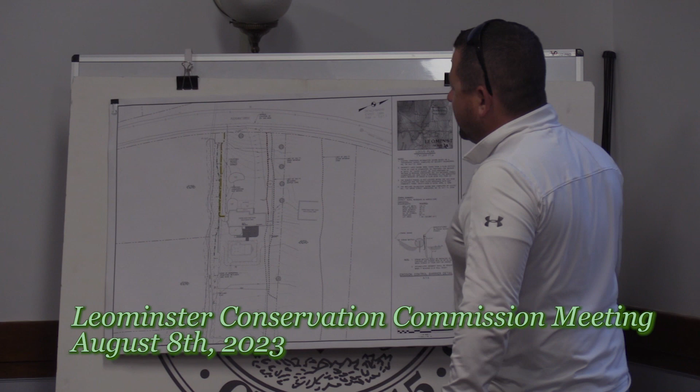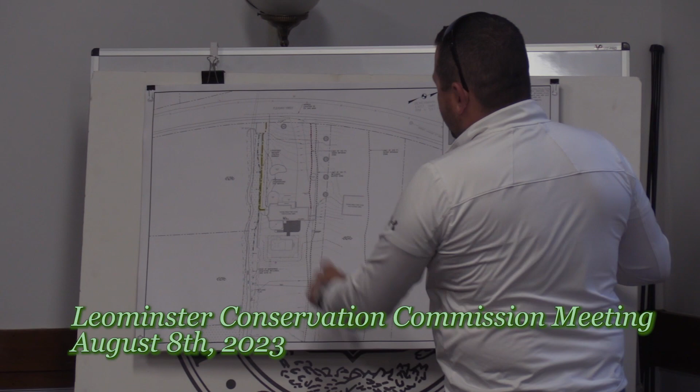We built the house in 2002. It's currently heated by oil heat. In the corner of the house, in the basement, is our mechanical room with 2 275-gallon oil tanks. We're doing a whole renovation of the HVAC system and we'd like to convert to natural gas. There's natural gas on the street, so we're proposing to run a new gas line down the side of the yard into the house.

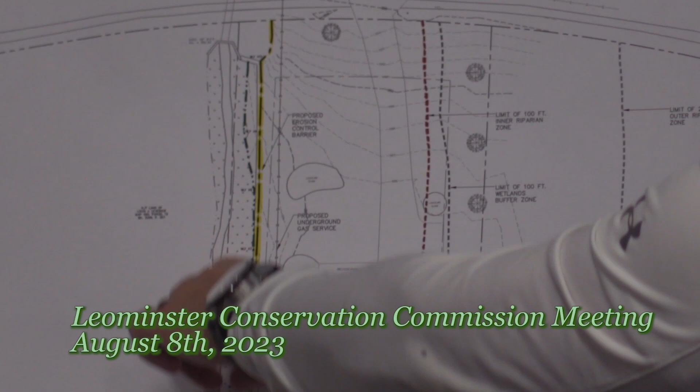This is Wilder Brook. There is a granite retaining wall along the side of Wilder Brook that varies from 4 feet to 6 feet in elevation change up to my lawn area. So we're proposing to run an erosion control barrier, stake silt fence and straw wattles along the top of the wall, returning to the house, then put the gas line in. National Grid would do the actual line installation, but since I'm pretty meticulous about my yard, we'll have our own crew there to install the silt fence, assist with the backfill, get the loam and seeding done right away and restore the lawn.

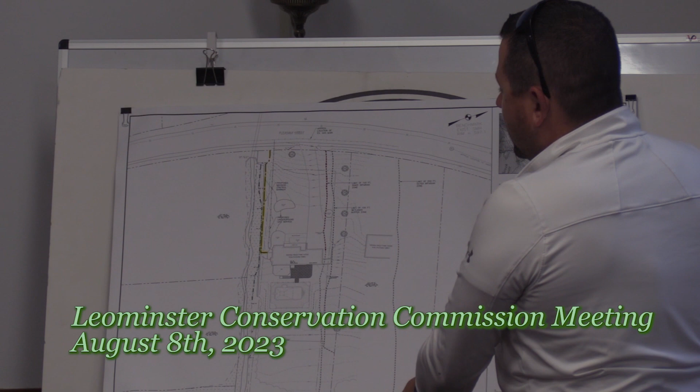So it's pretty minor, it's all currently developed area. I'm just hoping the commission would grant a negative determination so we can proceed with the gas installation. First question - this says in our agenda that it's for replacement of a gas main, that's not correct, is it? That was for installation of a gas main, correct.

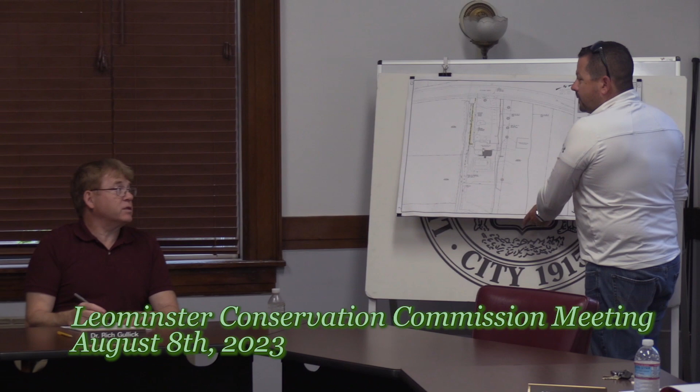So let's please update that in the agenda for the record. How deep do those lines have to be? Only about 3 feet. So you trench it? No, they're actually going to dig it, but they use a really skinny bucket. I'm actually hoping they'll let me dig it myself with the mini excavator, and then I can minimize the mess.

It's kind of like a digger for a cable. How small is it? No, it's an actual trench - you have to dig a 1 foot wide, 3 foot deep trench, put some sand in the bottom, lay the pipe, cover it with sand, put the marking tape, and then put it all back together. So 3 to 4 days tops. First day we'd set up the silt fence, second day would be the tap in the street and potentially some site work, and then continue to the house, backfill, loam, seed, and turn the sprinklers back on.

Commissioners, questions, thoughts? I had mine. Okay, anything else?

Okay, with no further questions from the commission, we'll open it up to the folks in the audience if anybody has questions related to this particular case. Then we'll close this hearing, having checked with the audience, and move on to Mr. Kremp. What do you recommend in this case?

It's a pretty minor job. The only reason I advised Patrick to put in an RDA for this is because of the proximity to that stream. But like you said, it's existing lawn, it's really quick work. So I would recommend that we find a negative-3 determination, specifically that this work is in the area of our jurisdiction, but will not affect the resource area given certain conditions. I'd suggest we put in the condition that there's an erosion control barrier, which Patrick already stated they're planning on putting in, and that they would notify me when they're planning to begin the work. That's my recommendation, a negative-3 with those two conditions.

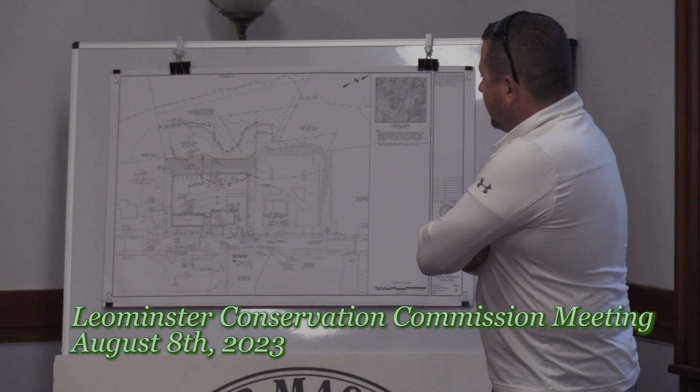Here tonight representing New England Style, who is the applicant and has the land under purchase and sales agreement from my father, Daniel McCarty, under his realty trust. A little backstory: my father purchased the property about 30 years ago.

It was mostly wooded. There was a small auto machine shop building here where the guy would rebuild engines and do auto repair. My father's initial thoughts were to build a 2-story industrial building because the site did slope down towards the back.

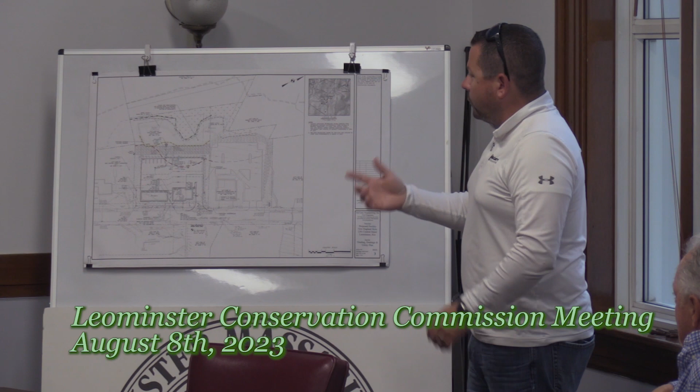So Route 12 here along the bottom of the page, slope towards the back. That building turned out to be very expensive to build because the foundation would have to be so strong to resist the soil above it. Never really made sense, so it ended up splitting into 2 parcels.

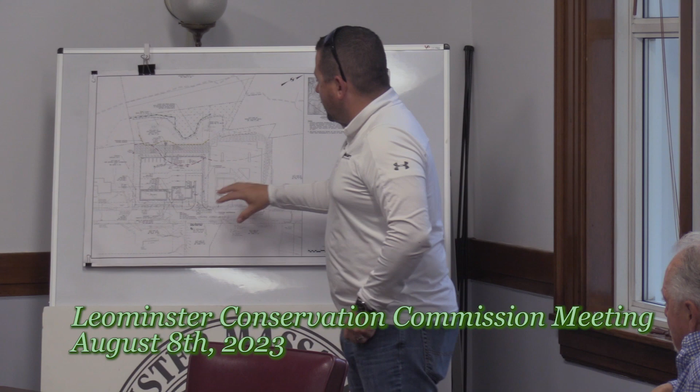The original parcel was here along the street, all the way to the back, this jog here and back. We split off 1 lot, sold that to the Jehovah's Witnesses who did their own Kingdom Hall construction on this portion of the lot. Prior to even doing that, we had filled in both sides.

We had constructed the detention basin, installed the outlet control structures. So when we did the site plans and permitting for the Kingdom Hall, we used a portion of the capacity of the detention basin.

And now with this new project, we're proposing to use the remaining capacity of the detention basin to handle the stormwater that's coming from this project.

So we have the delineated edge of wetlands that was delineated years ago and re-verified by Mary Ann DePinto of 3 Oaks Environmental. Her reports are included in the notice of intent that was submitted.

We have the existing slope here that we were showing riprap, but it's taken so well with the loam and seed that we're going to take the riprap off the revised set of plans, and this will remain as a grass slope.

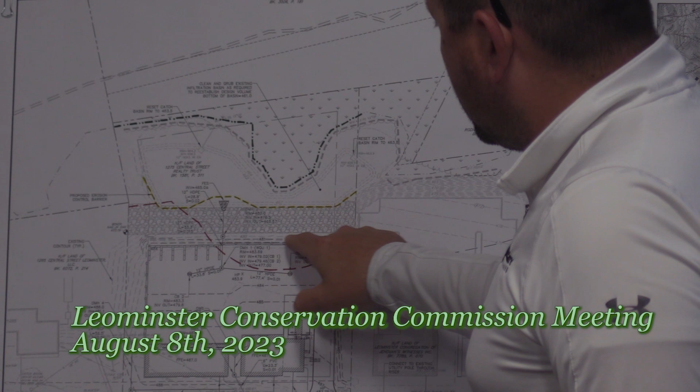So the wetland line is here, the red is the 100-foot buffer zone, so the work that's within jurisdiction is this small area of gravel laydown yard, the guardrail that's at the top of the slope, and then we do have 2 double catch basins that go to a water quality unit, to a manhole to step down the grade, and then the discharge pipe to the detention basin.

Please describe the water quality unit. It's a proprietary stormwater unit that's meant to remove the total suspended solids from the stormwater before it discharges to the detention basin. There are different manufacturers, Stormceptor, HydroWorks, which essentially create a vortex inside of the structure.

So as the water comes in, it gets that spinning motion, it forces the particulates to the bottom, and the clean water goes out the discharge side to the detention basin.

What about petroleum products? They're also equipped with hoods. The catch basins are equipped with hoods, so the oil, being lighter than water, would sit on top, and the clean water would go out under the hood. So if there was a spill, it would get caught in those structures.

Anything inside the building would get caught by the floor drains that go to the oil water separator, which then discharges to the city sewer.

I guess that's part of the history that I forgot to tell the commission: this site didn't have sewer, so we extended the sewer years ago, probably 2008 or 9.

We started at the trailer park where the sewer ended, and we ran a sewer line up Central Street within the pavement, providing stubs to the abutter up on the factory and the house up on the hill, the single family house that was here. Then the sewer comes into the front of the site, continues all the way across, feeds the Kingdom Hall, keeps going to feed these buildings, and we brought it over and tied it into the animal hospital.

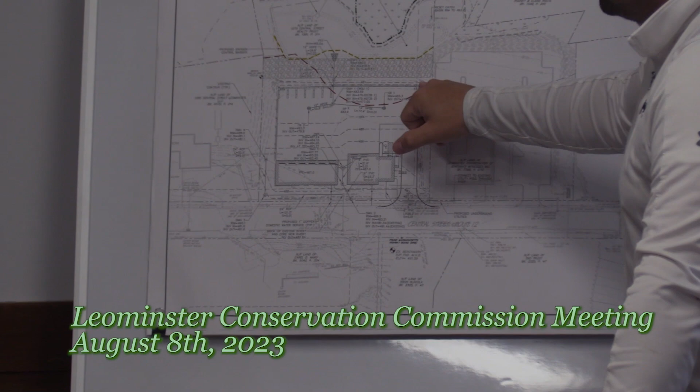Thank you, sir. Commissioner? You mentioned snow storage, where would that occur? So we're gonna have it here along the side of the driveway. The thought process being if you're plowing and coming in, you'd angle your blade away from the building, so you'd windrow here along the side. We have this large area over here where we could stockpile. There's a guardrail, so it's not practical that we'd push it down over the hill and take up detention basin capacity, so it would really be the outside edges of that.

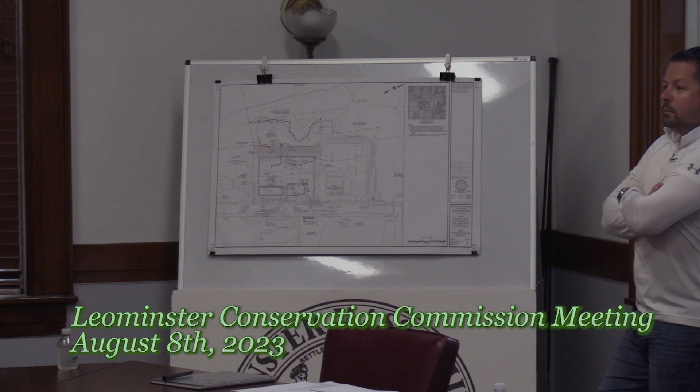Well, I would be wondering if you put it on the pavement, and if there were to be any melt with petroleum contamination from parked vehicles or wherever, that would go into the drain that goes through the oil water separator. No, so the oil water separator is just for the interior drains. The exterior from the parking lot, that's when you have the catch basins with hoods.

The hood is meant to stop it, it goes into the outlet pipe as a shield, and so any floating debris or oil sitting on top of the water doesn't get down there. And then, of course, DEP regulations say, I believe it's 15 gallons -- if you have any spill greater than 15 gallons, you have to call DEP and the fire department to respond to that. Commissioner Quinn? So that would take care of any sediment or petroleum product.

But I can't imagine that would be particularly effective for salt or anything dissolved in the water. Right. Okay, yeah. So are we planning on salting this parking lot? I would assume. Are there?

Please don't take offense to this response -- I've been an expert witness in 7 slip and fall cases as a professional engineer, and I will never tell any of my clients how to treat their parking lot. That's their best management practice on how they see fit to manage that. If it's sand, they're comfortable with sand, they have the cleanup. If it's salt, they're comfortable with salt for the melt off. I'm not in the business of telling them how to sand or salt, and I wouldn't recommend, from my expert witness standpoint, that you are either. No, I completely agree with that.

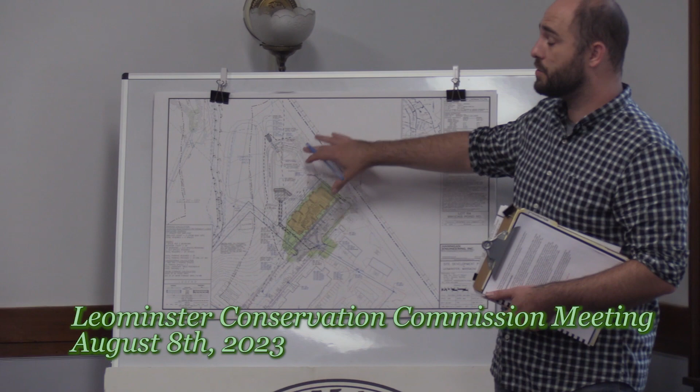This project was originally permitted back in the 90s and 2000s before the onset of current stormwater standards. So this existing basin that's already currently on the property accommodates all the stormwater runoff from the development, or a good portion of it, mitigates it before it discharges further closer to Keyes Brook. As part of the overall development, we're effectively, for lack of a better term, beefing up this basin substantially. The basin has currently kind of fallen into disrepair, and opportunistic vegetation is kind of taking its place.

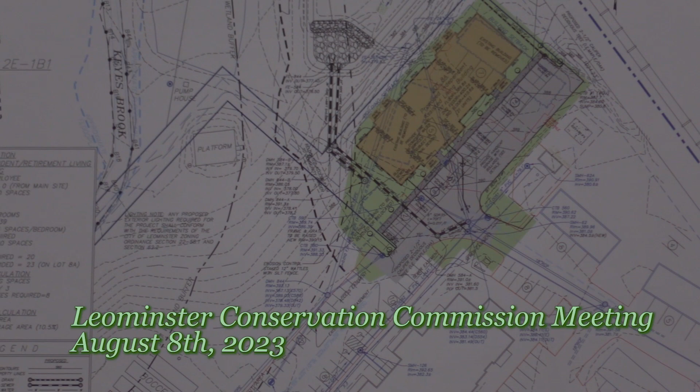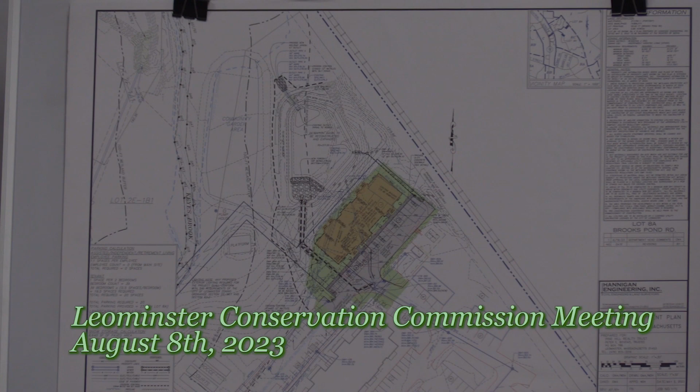So it's the intent of the applicant to effectively clean up this basin, make it more compliant with current regulations, and to increase the capacity significantly to accommodate this development as well as another development located elsewhere on the property. So the only work that's truly being performed within the jurisdictional areas would be associated with the redevelopment and recreation of this detention basin within the 200-foot riverfront area. This would also be located outside the 100-foot buffer zone. So it's pretty far set back from the river, and it's just purely to recreate this detention basin.

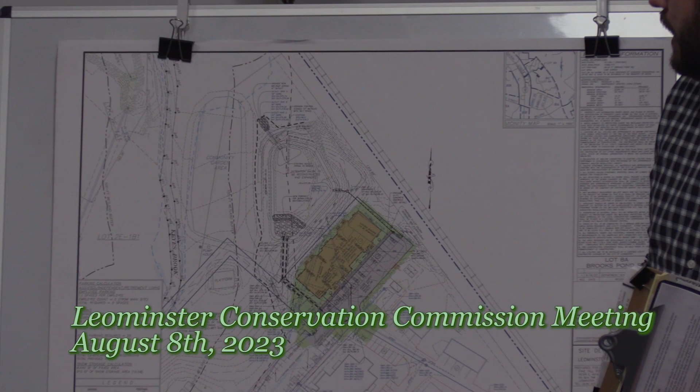At the end of the day, the proposed additional modifications to this basin will encompass approximately 19,315 square feet of the riverfront area. Per the regulation, improvements associated with stormwater management features are exempt from the Rivers Protection Act, with the exception that there's no viable alternative. This is already currently the low point of the entire property, so by default it's a more advantageous location to put stormwater management features. In addition, all this infrastructure has already currently been developed, and what we're doing is improving upon that as part of the stormwater management. So we're trying to improve this as much as possible.

At the end of the day, this basin will be approximately 33,000 cubic feet larger than it currently is, so it's not an insignificant number. We're maintaining the outlet structures so that they continue to operate as originally designed, but at a lower rate. If you think of it as a bathtub, if you have a small bathtub with a pipe out at elevation 100, with the bottom being at elevation 90, for lack of a better term, what we're pretty much doing is lowering the 90 elevation so that the water doesn't reach as high. Just a really quick analogy for this kind of design.

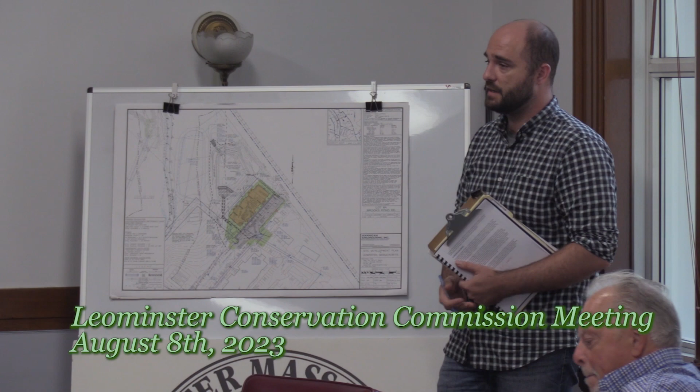With that being said, that's the general consensus of the project. We haven't received the DEP file numbers yet, so we do know this will be continued to the next hearing. But we figured we'd get in front of the commission, get any initial feedback or concerns, and we can address them prior to the next hearing.

Okay, thank you, Chris. Questions from Commissioners?

You first? Yeah, so this isn't related to the construction of a new 21-unit apartment building. This is for the improvements of an existing basin. Indirectly, yes and no — we're doing the proposed improvements because we're building that building. Okay, so the building is precipitating the change.

Where is the building relative to the jurisdictional lines? So the 200-foot riverfront area is right here — I apologize for not having a better marker. Okay, so the building is 1 foot outside the 200-foot riverfront area. So the building in all its own — not an accident. No, that's very well designed. So the building is located outside of it, all the sidewalks, all the impervious area. This is just purely detention work associated with that development.

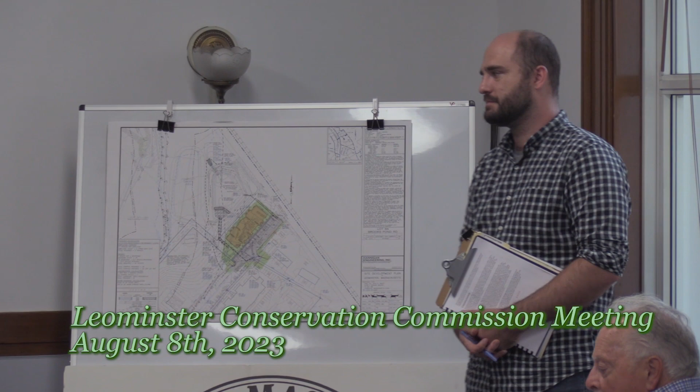It's a nice looking detention pond right now with a lot of plants, a fair amount of purple loosestrife, I guess. We're going to dig it out and it'll regrow. Commissioner Chambers: What's the footprint of the building?

It's a very good question. I don't have that number off the top of my head. It's an assisted living facility. I asked that just to understand how much impermeable surface you have right there.

It's already impermeable because they're taking down other buildings to put it up, but they're smaller buildings, and it's located in an area of pavement. We went through the planning board process, which was also reviewed by DPW. This project is also associated with another project elsewhere on the property that also drains into the detention basin, so we took a look at the overall impervious area developed between the two projects. That square footage is just over 16,000 square feet of new impervious area.

For purpose of analyzing this basin, we took a 100-year storm event, a 7-inch rainfall event, times that by the square footage of the impervious area as a rough drainage cut analysis to figure out the volumetric increase in runoff at the highest storm event. That turned out to be around 9,400 cubic feet. So we're giving it 33,000 cubic feet when we really only need to give it just shy of 10,000.

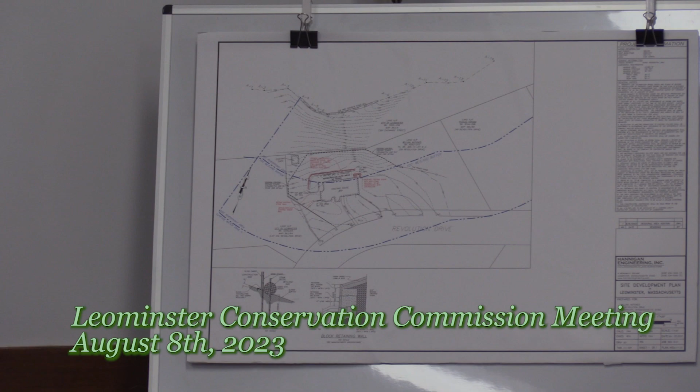There is a room above this patio that's held up by posts or elbow joints or whatever, so that's what they're worried is gonna collapse. If the soil under it collapses, if this wall collapses there -- correct. So we're getting ahead of the issue before it occurs.

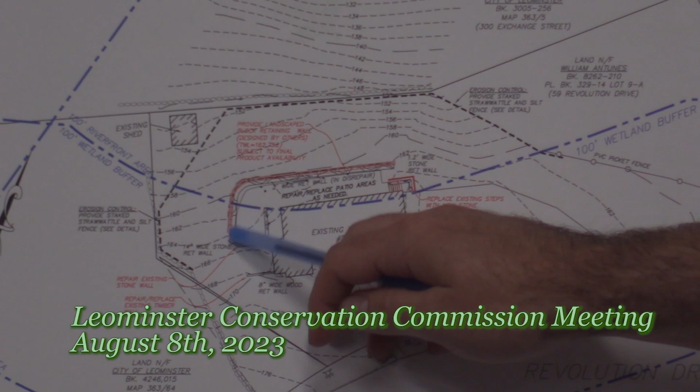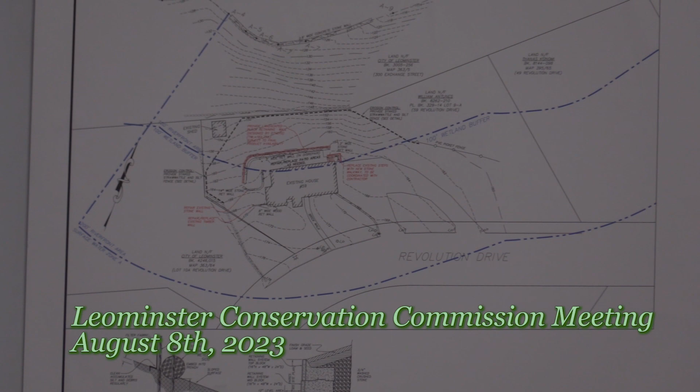We'll be installing straw wattle and silt fence around the limited clearing of the site, so we can get appropriate equipment into the area to perform the work. Additional work will be replacement of several existing stone and timber walls that have also fallen into disrepair, as well as a new set of steps going from the driveway down to there to replace an existing set of stairs, which have unfortunately fallen into disrepair. I did a little additional research into the actual building. It was originally issued a building permit in 1989, so it's not a young house anymore. Due to the topography and other water conditions in the area, I'm not surprised it has reached the end of its life, so we're trying to get ahead of it before it becomes a bigger issue.

Please describe the topography and the vegetation between this zone and the reservoir. There is quite a bit of elevation drop. The existing wall system sits at around elevation 160-ish. The actual pond or reservoir area sits around elevation 126, so it's quite a bit of elevation drop down there. Much of this area has a large grouping of standing pines, which tend to remain intact at this point in time. But elsewhere around the immediate yard area, it's just filled with creeper and other not so pleasant plants for this area.

So part of this, getting in here and doing that, they're going to just clean up the edge of the lawn and remove any of that creeping vegetation. But it's heavily vegetated between there, with a well-established wood line right at the property line. The other area from the property line towards the house is a lawn area, or was, but has a bunch of creeper vegetation growing into it.

Thank you, Chris. Questions from commissioners?

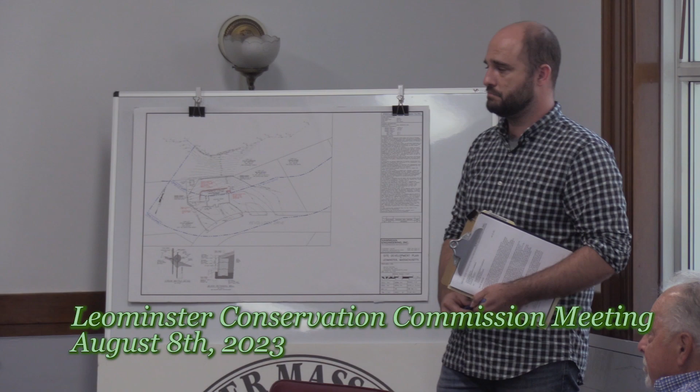I'll make a quick note while you're thinking of questions. In my almost two years on the commission, this is the most sensitive receptor we've come across, being a drinking water reservoir this close. Nonetheless, the work looks like it needs to be done to protect this part of the building and keep it functional.

So with that in mind, we'll ask if there are other questions. Anybody in the audience want to speak on this one? Sorry, I'm coming back here.

I do have a clarifying question. You mentioned cleaning up the edge of the yard. About how rough an estimate, how far in are they planning on clearing that? And is it going to be cleared and then erosion control placed at the edge of that clearing? Is that the plan? So the clearing will be limited to just right inside the tree line, I wouldn't say more than 10 feet, just to get rid of that.

If you remember, we were walking down into that area. Right on the right side, there's a whole patch of kudzu and a bunch of riffraff before it dropped off. So what we're gonna do is just get in there, clean up that area first, and then once we're able to get into the area to do the trenching for the erosion control, at that point we do that.

So the clearing is going to be mainly around that corner, pretty much just for access. Big enough to get a mini excavator in there, maybe expand it a little if they find an invasive plant further in, and then they can scrape it out and just get in.

But no tree clearing or big shrub clearing, anything like that? Just enough to get them in, and if we do find something significant, we can always reach out to the commission, but at this point we don't foresee that.